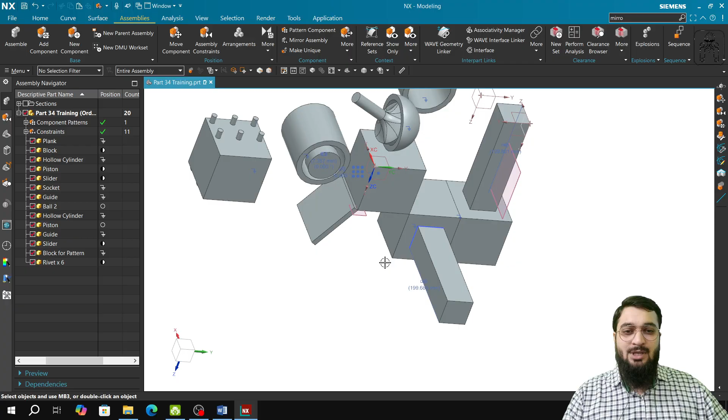So, what is a ball joint? A ball joint is similar to what you have in the hip, the hip joint. So it is something like that. I've created these two components in order to let you understand what a ball joint is. So I'll just click on the assembly constraints and I'll specify the part. The constraint to be done is the ball, and I'll specify the vectors.

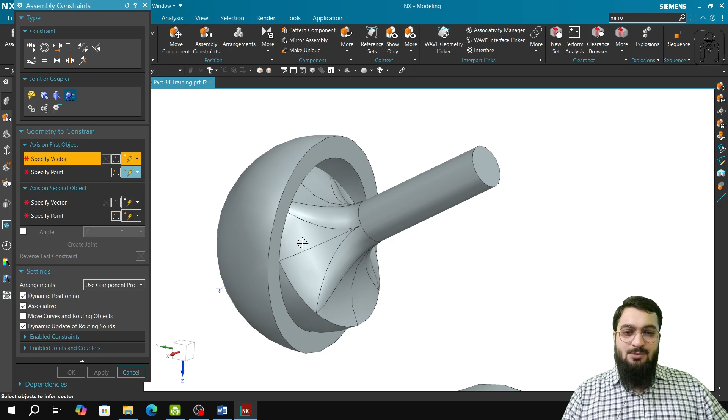So first I will specify the vector using the outer object, and you can do whatsoever, it is your preference. Rendering issue, just click on fit. Okay, so now specify the vector. I specified the vector. Specify the point, so the arc center should be selected. After that, specify the vector for the other one and specify the point again, and create a joint. And the joint has been created.

In order to change the angle, you can just double click on it. You can redefine it and use the angle part and redefine joint. So the angle can be changed with the help of the following cursor. You can orient it in whatever fashion you want, just like a ball joint, or you can input the value over here.

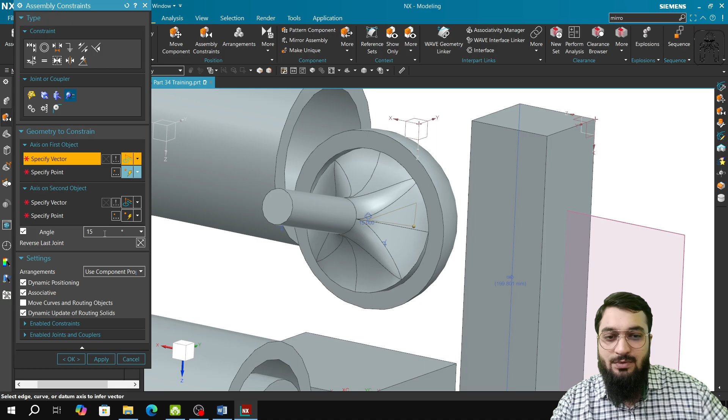For example, I want 45 degrees, not 345, 45 degrees, and it will be oriented in that fashion. Or I can click on 15 and it will be oriented in that fashion. So I'll just click on apply and the constraint has been redefined. You can edit it or you can redefine it, and when you have to edit it, it is better to use the redefine option. Okay, so now coming to the cable pulley constraint.

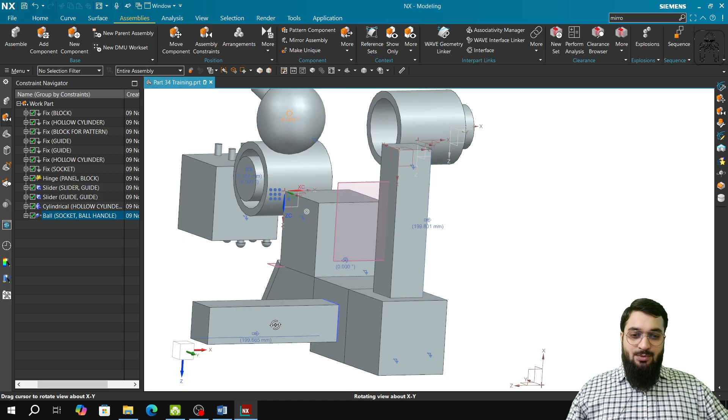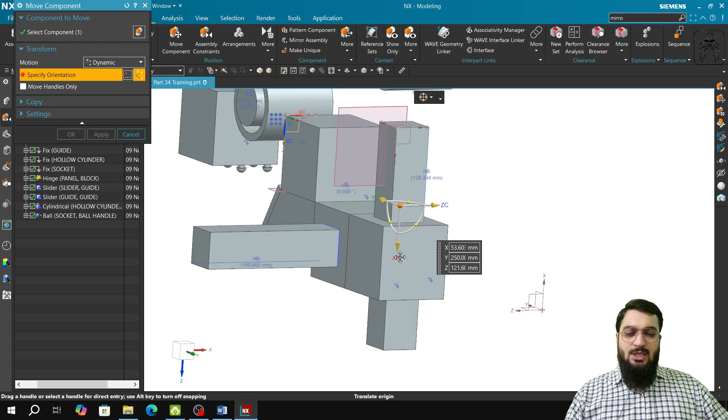Those who have watched our previous video in part 34 might have seen the slider assembly constraint, over here and over here, which allowed us to move this object in this manner and no other manner, and this allowed us to move this object also in this particular manner. Okay, so I will just click on cancel, discard.

What we have to understand with the cable pulley constraint is that it attaches the motion of two linear constraints into one. I'll show you an example. I'll click on the cable pulley, click on the constraint, and then on the other constraint. I'll create a coupler and click on apply. So it is very easy to do. You just have to have the right linear joint.

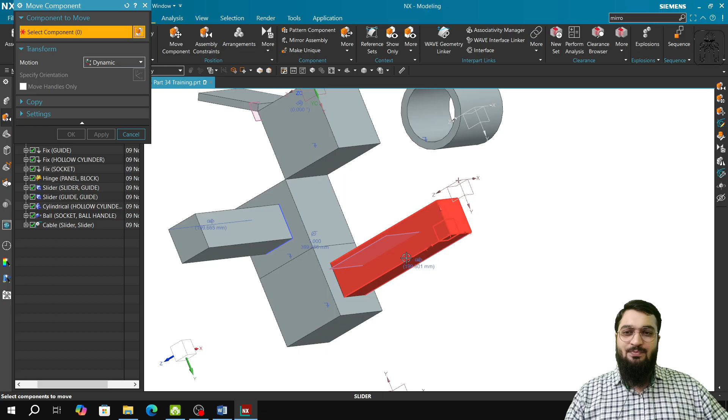I'll click on move component and you will see the magic. If I move this, this will also get moved. If I move this, this will also get moved. So you can define your coupler with the help of this. As you see, as of now it is getting away from that. So I'll just cancel that and discard the changes.

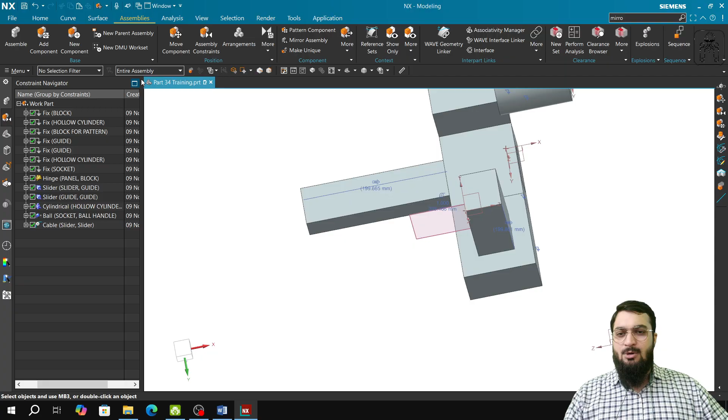Or what I can do is, okay, no problem. I'll just move this component over here. Before that, I will discard the changes. Cable, I will delete that. I will move the component separately without disturbing the other component, and it has moved. It is roughly at the edge.

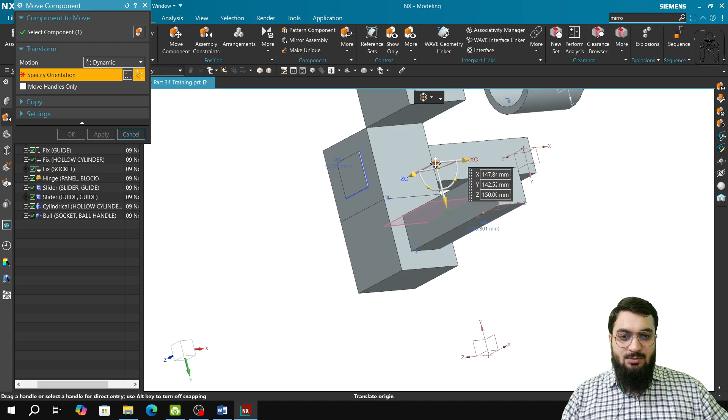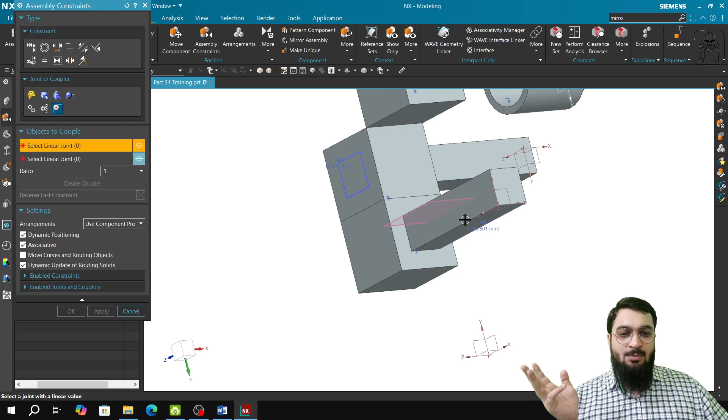The other thing you can do is use the option to align these two faces, and it will be perfectly parallel. After that, you can remove the constraint, and then use the cable pulley option. So I'll click on cable pulley, select this and the other one, and now I'll create a coupler. I'll click on apply and let's see the result now.

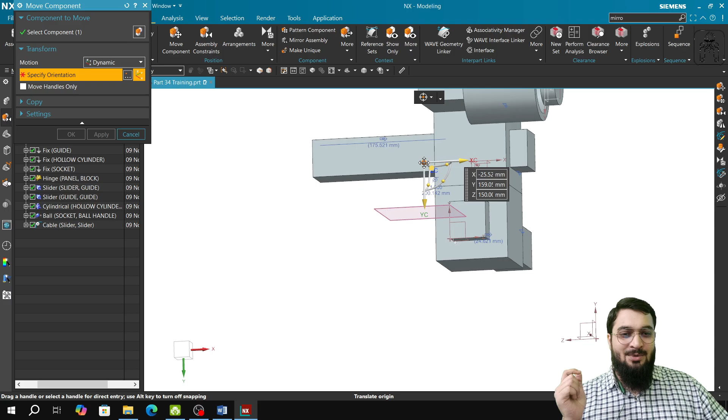If I try to move this, what will be the result? The result is perfect, as we wanted. It is moving in a much better manner and coupled with each other. So these were the two constraints that remained. So it has been completed, and I hope that you revise the concepts and practice it on your laptop or PC.

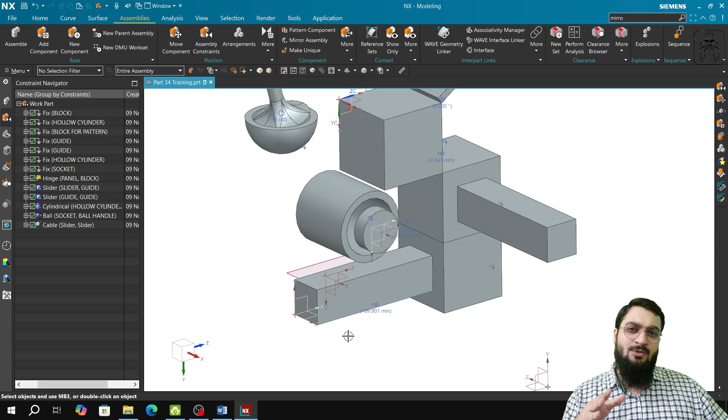Okay, so that sums up our part 35, and I have just part 36, 37, and 38 left. We'll do those in the next three lectures, and our lectures are aired on Monday, Wednesday, and Friday.